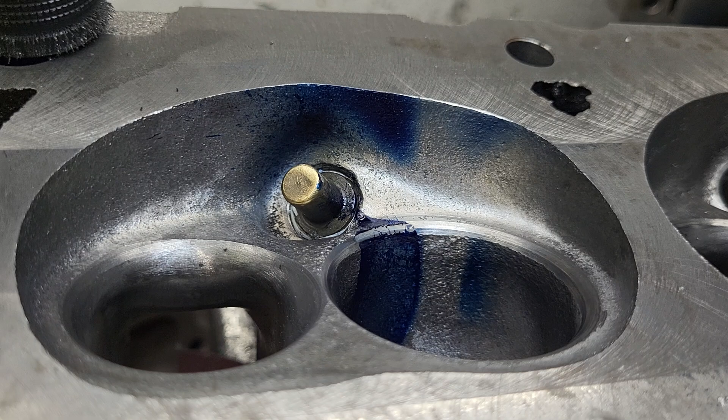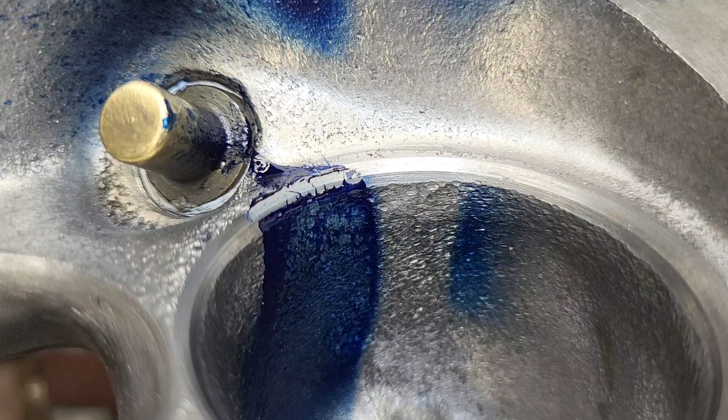This is our fifth cut. Our floor fin is almost 90 degrees. It needs a few more degrees, as we can see by the blue, but it's pretty close. Our blue looks a little thinner. We can see that we definitely got a good amount on the other side of the guide. We got some splatters across the back of the chamber.

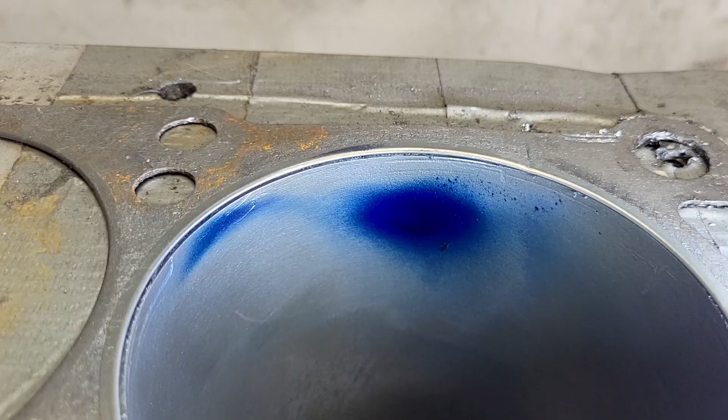Let's see what the bore looks like. Okay, looks like I sprayed a little bit less than usual, but it's a really nice pattern. And you can see how it's going on both sides of the guide. That looks pretty good. It's a little bit less of a spot, but probably because I sprayed a little bit less.

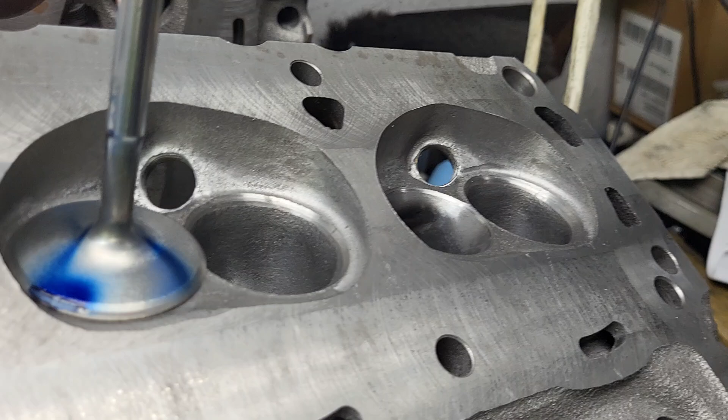Now, I still have a little bit of metal on these to adjust up and down with my air speeds, but we also did our first layback change on our short side. I also reduced the height of one side of the short side a little bit. Now, the short side is not thick, so you've got to be real careful and make very small cuts, otherwise you'll have trouble on this. But we were having the short side losing it at like 500 lift.

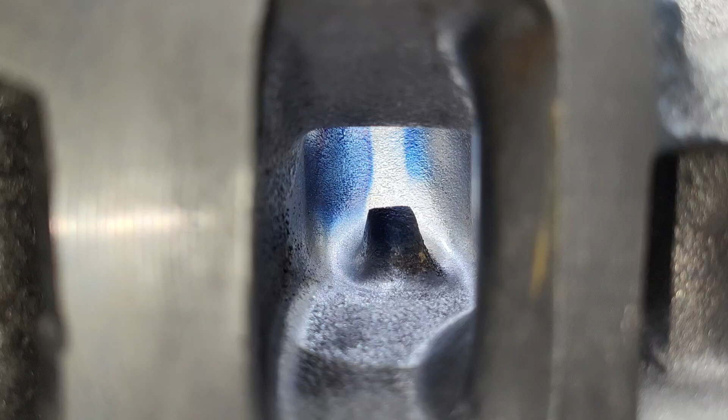Okay, right down its throat, it looks pretty good.

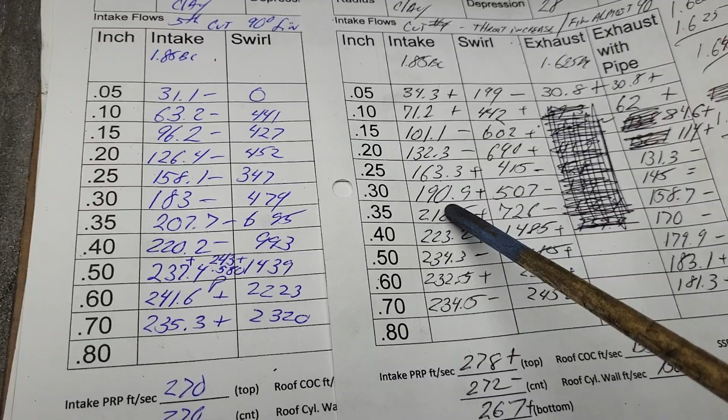Okay, so this is what we've got. This was cut number 4. It was okay. We had a decent 300 number, which we lost quite a bit on. But we didn't really top out that great.

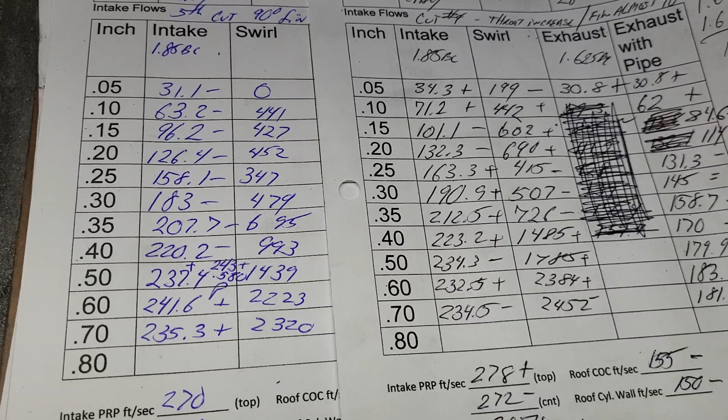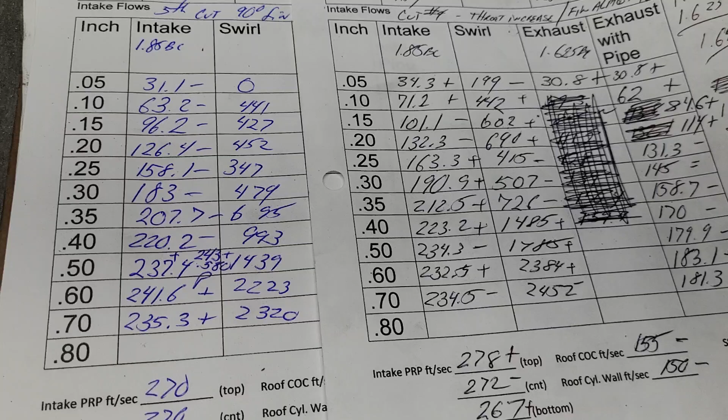Okay, now on Stan's site, there's a guy that did a set of these and got 245 with a 194 valve. And it's funny because Stan texts me and he goes, 'Do you know those flows have been in that spot for 10 years and nobody noticed they were small block?' That's okay. But they're in the FE section. It's this number head, C6FE.

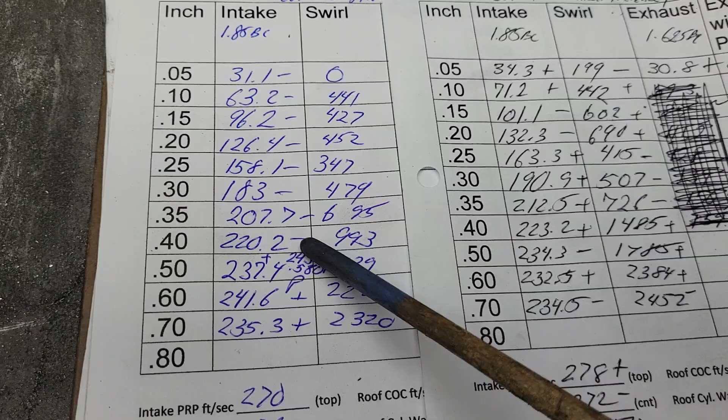Okay, so what did we do? We lost low lift everywhere. Decent losses, too. Not thrilled about it. Guess what? High RPM, you have to work on the short side. The short side is going to make or break it.

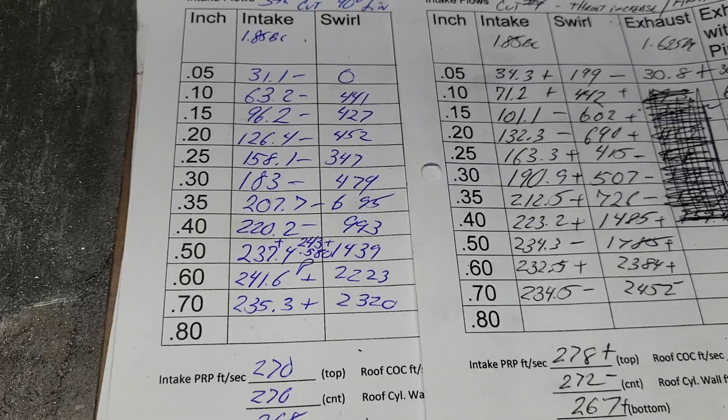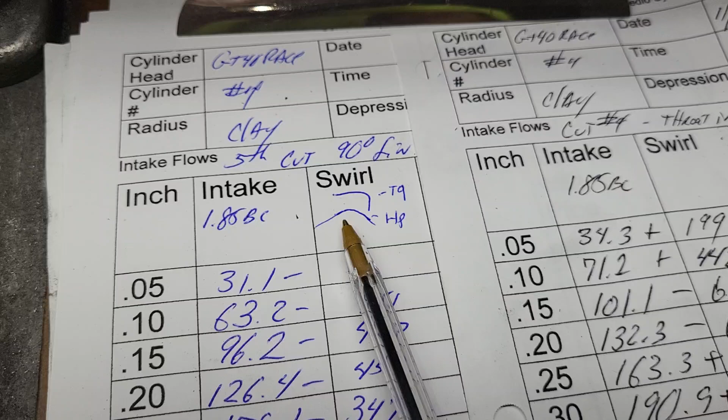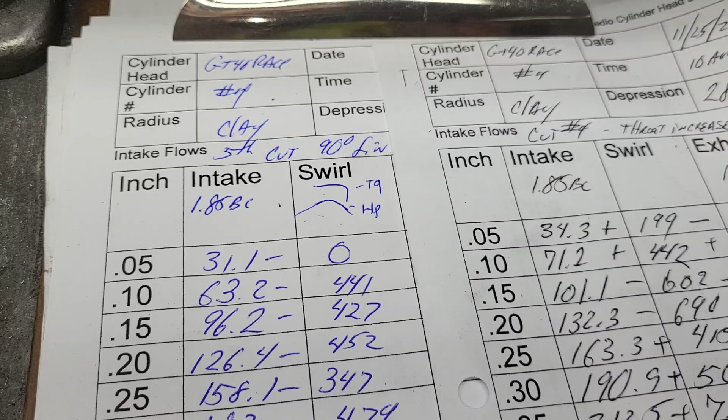Darin does a good explanation of this, but when we have our short side like so, it's good for torque. We start to lay it back, right? Push this apex back further. Works better for horsepower. And I would think the flatter this becomes, the higher the horsepower you're going to get. What that's designed to do is it's designed to just window right across the top of the valve and out chamber side. The short side's not really flowing anything at that point. Okay, so we're trying to get as much efficiency out of it as we can with where we're going.

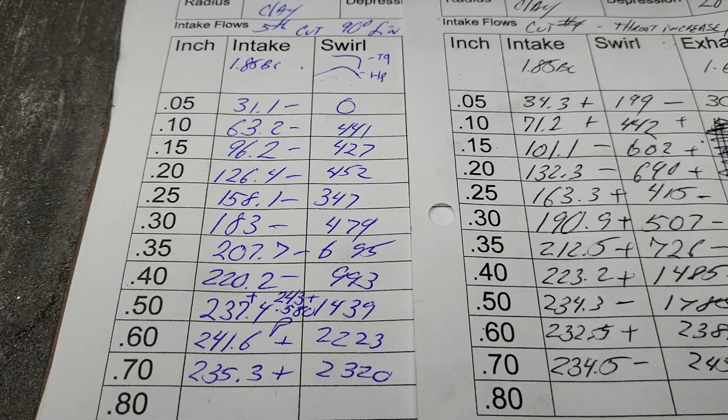To be honest, I don't know how much lift this cam is going to run. That may be worth a call. Speak of the devil.

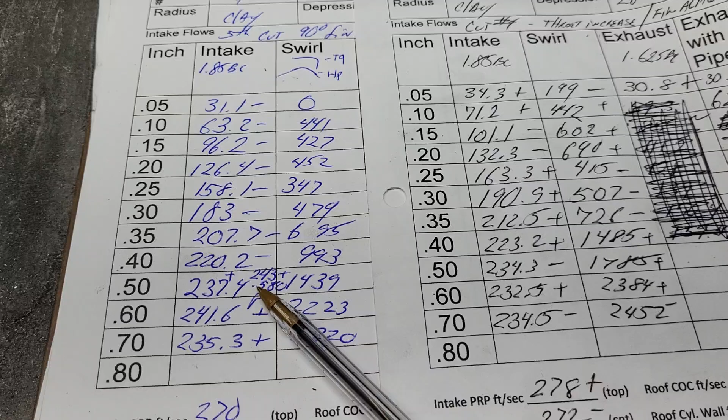Okay, may not be a total loss though, because we went up to 243 at 580 lift. So it's much more controlled up to that point. Now when it starts losing it, we even got gains up here after it.

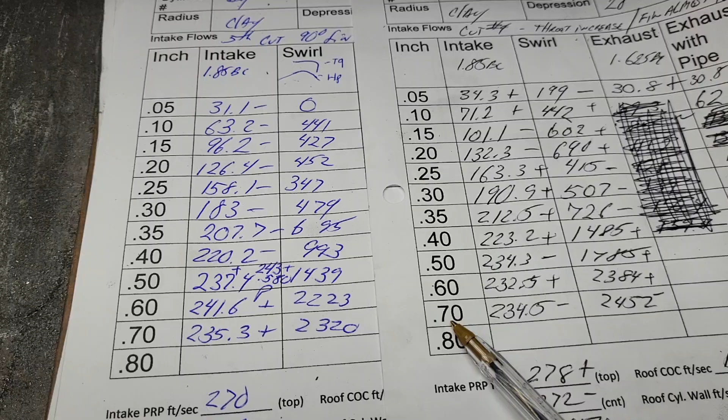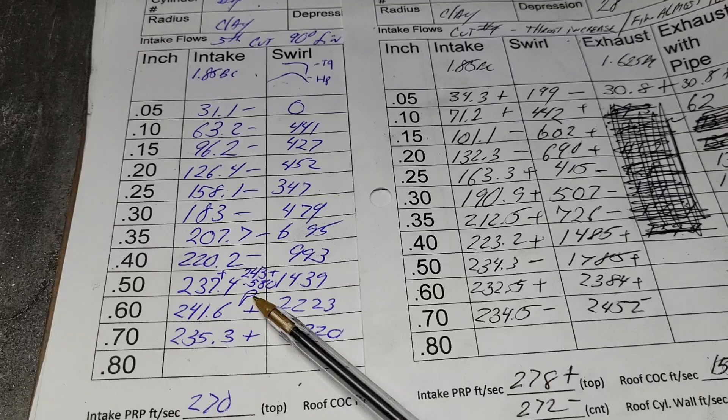Now at 237.4, see it has a P. It was starting to pulsate there. What that means is we're going into separation, and then it goes back to hugging the short side. Then it starts to go into separation. It goes back and forth. So it's ready to go.

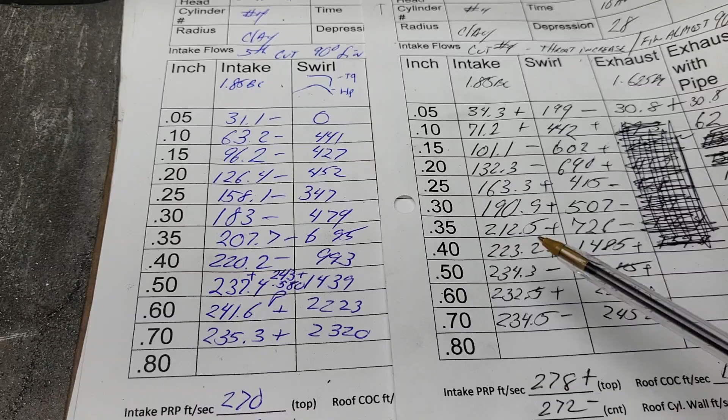All right, let's do some pluses and minuses for our swirls and see where it is.

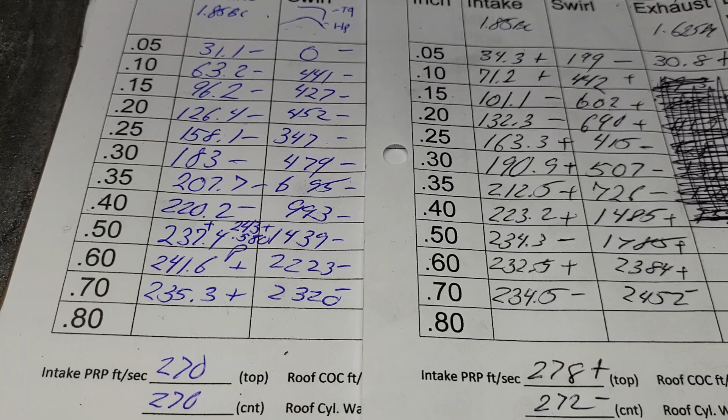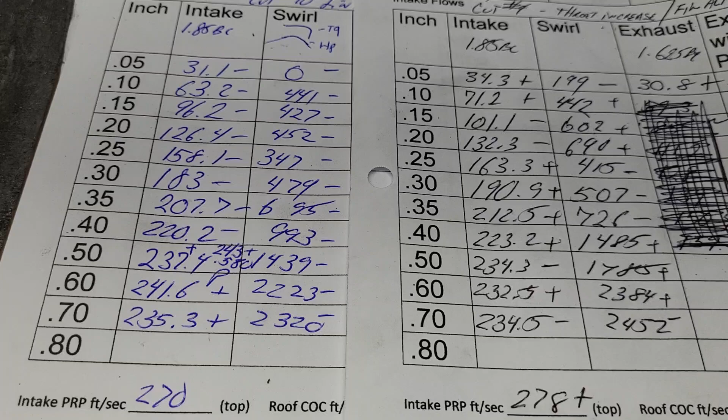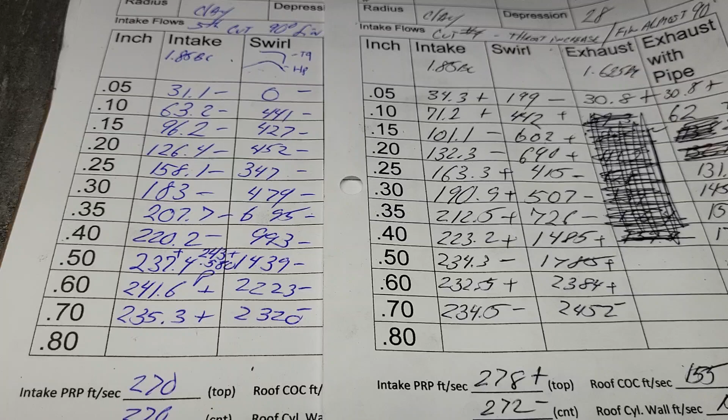Okay, now straightened up the fin and did some short side work and some bowl work, and we lost a little bit of swirl everywhere. Between 500 and 600, well, 500 is a little bit shy with the swirl. Got plenty at 600. I would guess, and it's only a guess, I'm not a cam guy, this will need at least a 650 lift cam. It is an endurance type engine, so I don't think 700 plus is going to work.

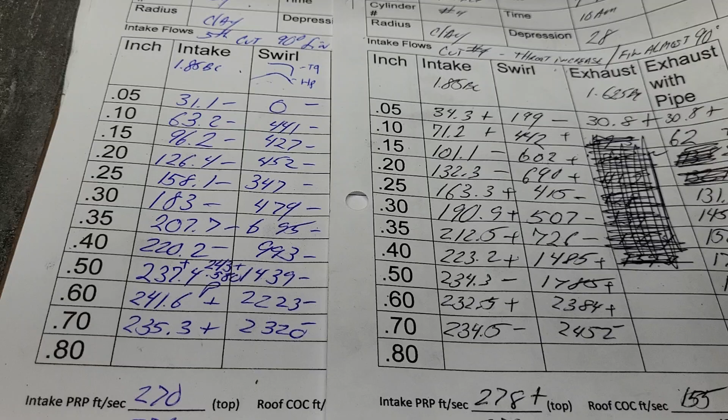You guys can give me a little feedback on that, and let's just compare our air speeds. Didn't touch the exhaust port at this point because the exhaust port is pretty close to where it's going to be. I don't really see a lot of gains left in the exhaust.

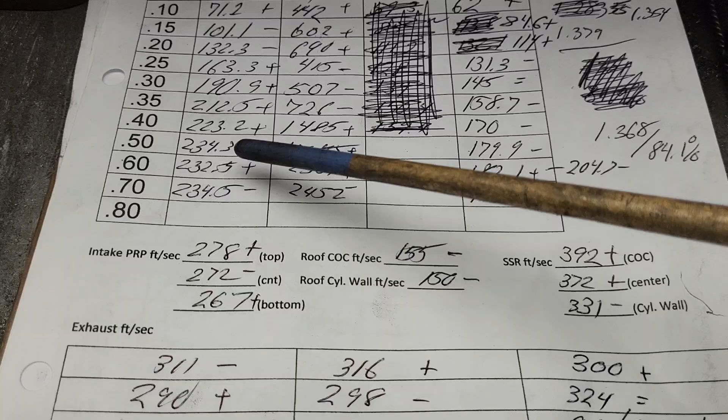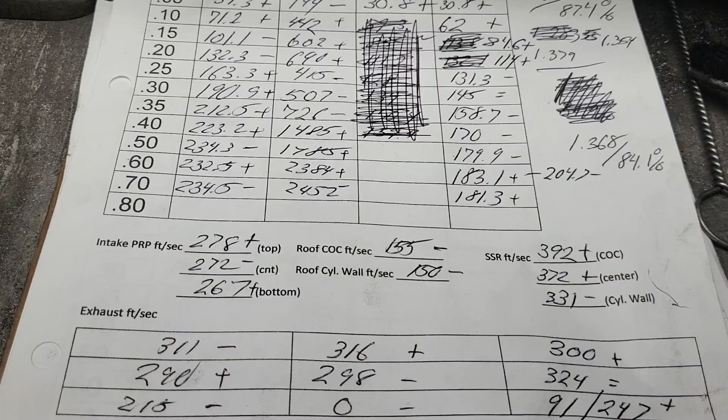Okay, now you're going to see where we were flowing 232, and now, even though we're into separation already, we're at 241.6. So it's only flowing a tiny bit more, and the short side's already starting to have trouble.

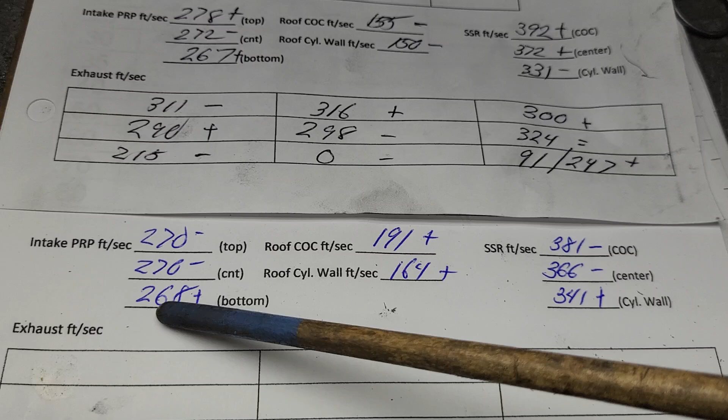But it's interesting when we compare our numbers here to compare our numbers here. Minus, minus, plus. Look at how even we are across the pinch. Pinch is not a problem on this head. This picked up quite a bit. This looks fairly good, right? Got some speed across the top of that bowl.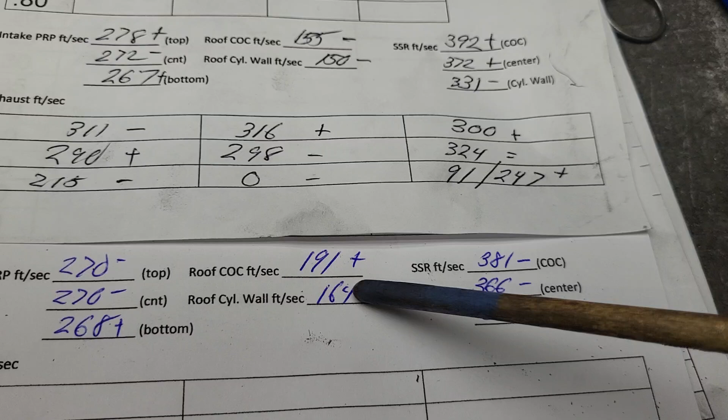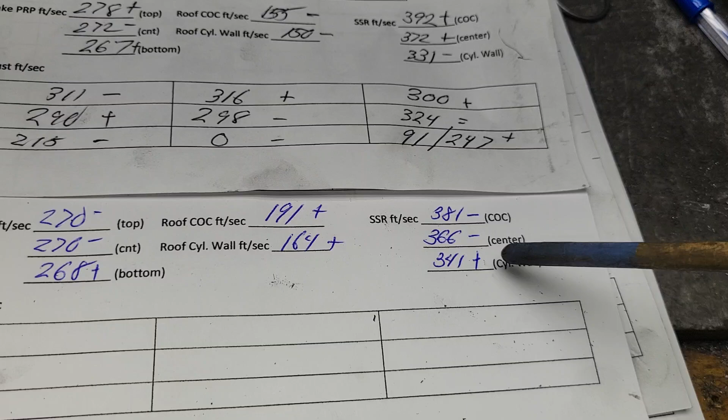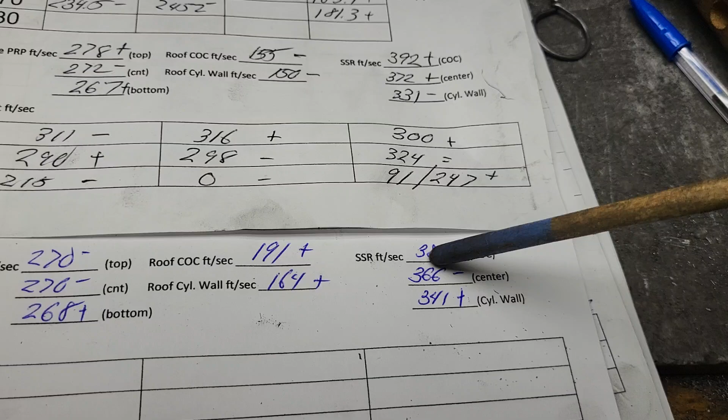I did open up both sides of that bowl a little bit, so both of it was working better. This is interesting here, right? We've got more flow, but we got minus, minus, plus, because I changed not only the layback, but the apex height just a tiny bit, trying to push more air over to our slower side. So I was successful. All right, it did move more air over there, balance the short side a little bit. We have more to do.

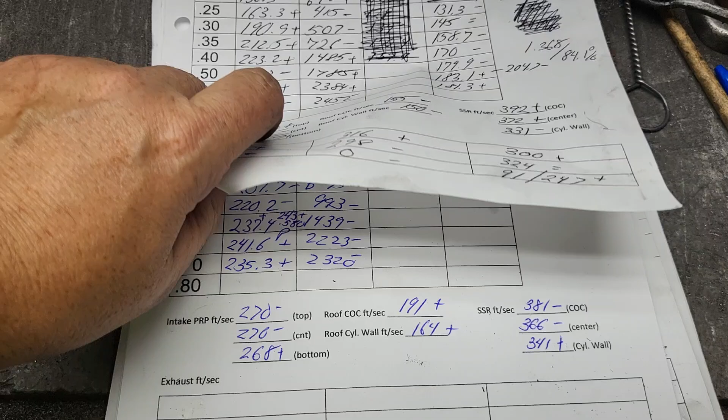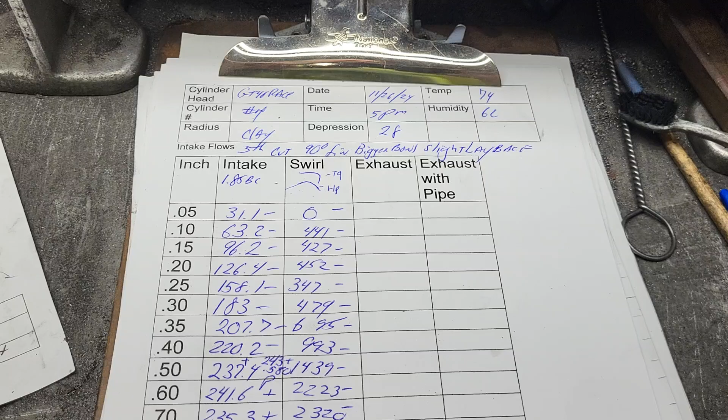All right, guys. This is kind of the 80-20 rule, right? You get 80% of the gains in the first 20% of the work. Now it gets to the nitty-gritty. That's why I'm only doing the intake at this port and at this point. We just got to finesse a little bit more here and there and see what we can do without exceeding the casting's limits. And that's what it's going to be.

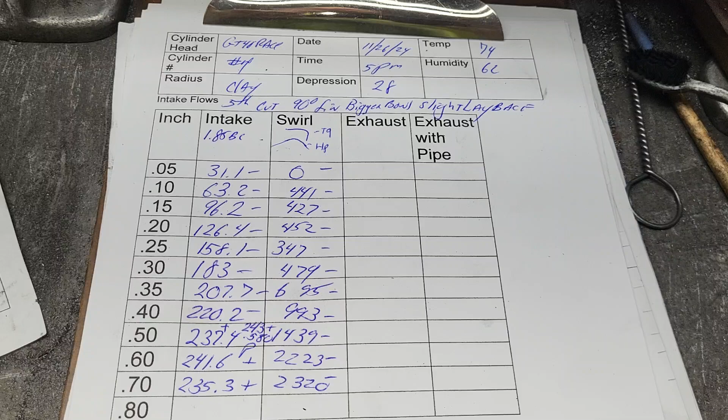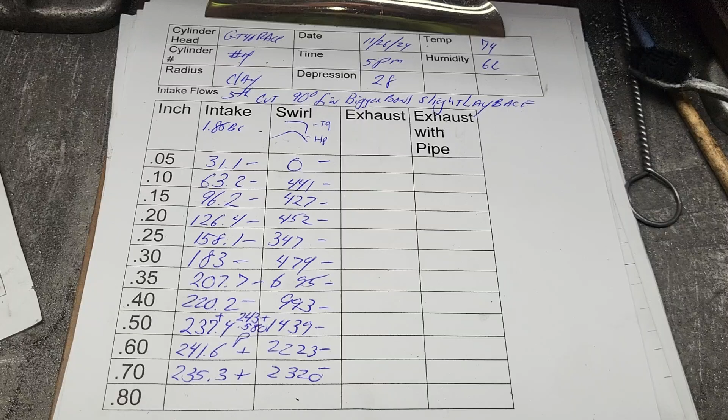Almost ready to start bolting on the intake. I think I will do, if I remember, a little bit more on the intake port, and then we'll bolt that intake up, and then we'll start hitting that. Because it doesn't make any sense to make the intake ports flow in excess of 250 if it can't get the intake manifold there. Now, we've got it on good intel that the intake will flow 300 plus. I've never seen a dual plane go anywhere near that, but anything's possible.